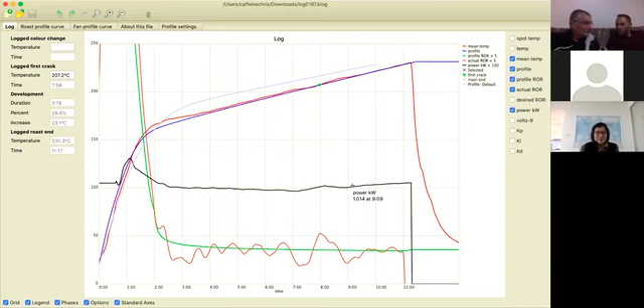So there's two things we could do, Simon. The one is like Chris says, add a power curve into it. At probably what time would that be, Chris? Probably around about 7:10. Well, the way the power profile works, it picks up on the amount of power that's being delivered and then holds steady from that, with a programmed increase, decrease, or even zero flat.

And so what I'm thinking is coming through here, everything's very much under control. And if we picked up that power level there at 6:27, which is 980 watts, and brought it all the way through to there at 1014 watts. So we just made a straight line from there to there.

We're of course assuming that we will be pretty much in the right spot when we come back under control at that point. Yeah. But it may be that simply putting in a boost zone through here just earlier works better. It's an unknown at this stage. Yeah. So Simon, I would try that if I was you. I would try that boost zone a lot earlier.

I would try that boost zone around about your 650, 648, 650, 655 mark. I would start the boost there. And if you look at it, I would end my boost somewhere around probably the 820. Hey, Chris? Out that far? Yeah, or maybe 815, somewhere around there. So you'd be boosting from 650. Yeah. Which is actually the moment that it starts to crash.

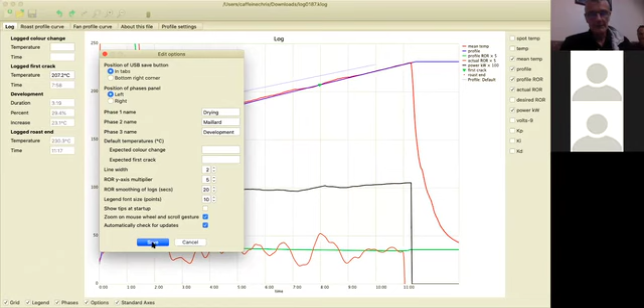So you use it judiciously, and that's why when we were looking at what times you would use to set around that, we looked at the log. I was using 20-second smoothing on my rate of rise line, and that enabled me to pick out the crash from all the other noise going on. So I picked the start and end of my zone really based off that rate of rise.

Correct, yep, 100%, yep. Does that all make sense, Simon?

Sorry, I just had to mute because my computer's deciding to be a hairdryer, so hopefully that's not too much background noise. Yeah, that's great, thanks, that's really good explanation there.

Yeah, absolutely. So getting rid of that kind of dump after your first crack, it's two things - you're either using the tee up of your profile, so your energy coming into the bean through endothermic and then exothermic, using that as a natural boost, or you're adding a boost into that time. But if you make the boost too long, effectively all the work you're trying to do, you will take away, because the profile then overcorrects and there's no longer a problem to correct.

What you're telling the profile essentially is that there's always an error, there's always an error. So there is no error, but you're telling it there is one, so it's always going to try and correct. That's where you see those oscillations over or past first crack. So the time in which you use that zone is critical, not to overshoot it, but also not to undershoot it, because then you won't get the desired effect.

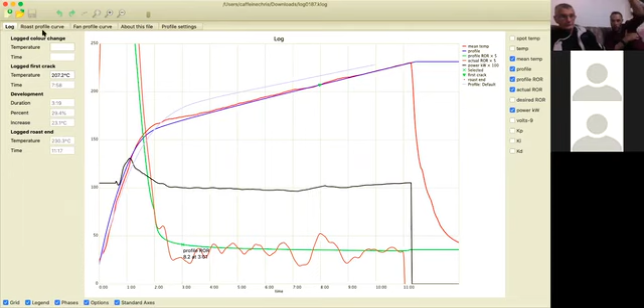Now if we were to reshape your profile, we could do two things. I would start with your ROR line from the start - that huge decrease you're using to get to where Chris is pointing, about the 3-minute mark - I would have that coming down at a further angle, not being as direct or linear as it is, more of an angle.

What that will do with the rest of your profile is, instead of flattening out your curve, you'd almost have to manipulate your curve like a C shape, if that makes sense. And what that does essentially, Simon, is at the bottom of that ROR curve when you're flattening it out, you're still applying heat to the curve, but you're not applying enough heat at the start of the curve.

So you're thinking to yourself, I'm going all the way up, which means that my ROR is dropping. Effectively it's dropping, correct, but it's bottoming out at the end. Okay, so still a decreasing ROR.

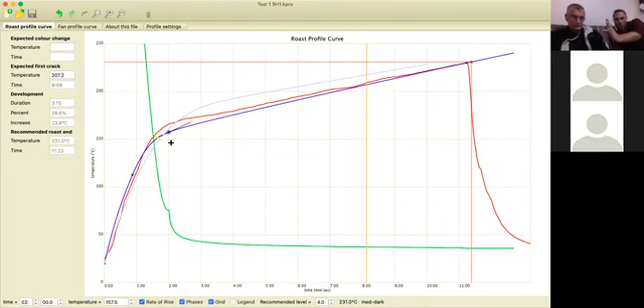The problem is that you're losing too much heat through your Maillard phase, going from exothermic to endothermic, endothermic to exothermic. Okay, so if you had to reshape that profile by bringing it up slightly, which would then shorten your time, you would get a lot more heat generation through your endothermic to exothermic transition. That's what I would say.

So how would you reshape that? I'm actually having trouble with the mouse. Okay, no problem, on this one here. So how would I reshape that?

So actually, if you zoom in, yeah. You can share your screen. Could I share my screen? Yeah, okay, well let me zoom in, that would be easy, wouldn't it? And then we just need to make sure one of us is muted. Sorry about this, guys, give us 2 seconds to do that, Simon.

Okay sure, I'm trying to show you what I want to do. So I've got a profile open at the moment that Chris and I have been tasting and working on, and I'm going to change that profile. Or you know what I'm going to do, Simon? I'll probably bring up your profile and just change it on there if you're okay with that. Okay yeah, that's fine, thanks.

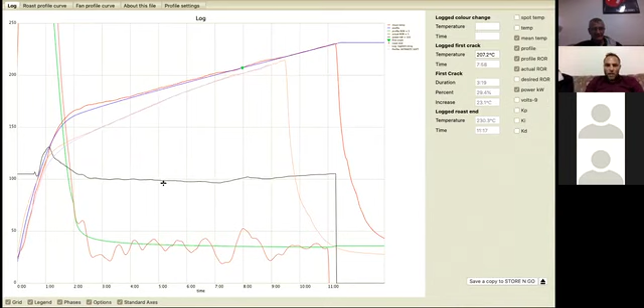I'm going to open that up, and there's your profile. Okay, so if we look at it, that there is beautiful. Okay, and we can see how, so let's do this quick. Sorry Simon, let's just clear all comparisons, so I've got 2 profiles running. So there's a couple of things I look at. I look at this line, which is your power line, I'll look at that flick up, and I'll look at your temperature line sitting under the curve at the start. Okay, so it's matching around this kind of point over here. I almost look at it matching around this point over here. Okay, so how do we change that, essentially?

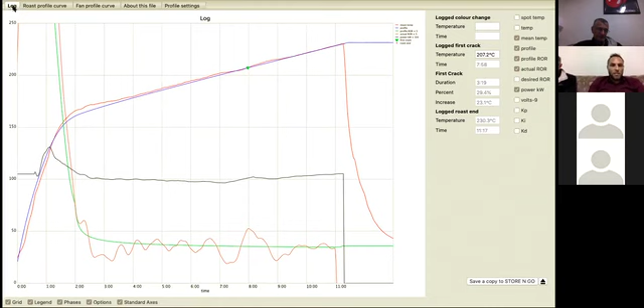Export to profile. There we go. So if I had to look at that, let's just check one or two things here. There we go. Right, so there are.

So Simon, okay, as you look at me pulling it, you can obviously see what I'm doing. So if I go back to your profile, so there's your profile. This line here, I'm trying to almost get this line to follow on there. So if I take that point, for example, and it's just a rough kind of manipulation, and I show you there. Okay, that makes sense. Okay, yeah. Now there's a couple of things I can do here. I can either do that, pull that point like that, okay, which will essentially allow my temperature profile to shoot over and then come around, follow my point, and meet up there.

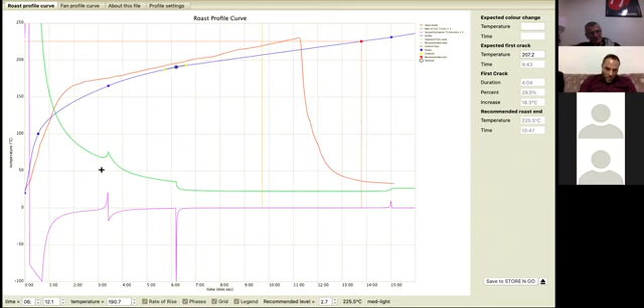Now how I do that essentially is to bring that profile, and you can see how I'm moving your ROR line slightly higher up. So what I'm looking for is for it to follow this trajectory and not a steady trajectory at the bottom. So I'm constantly looking for my ROR to drop.

What that's going to do from the profile, from what I've seen with profiling, is allow this temperature, this mean temp, to increase to here, which is teeing it up. The profile will then, after 30, 40 seconds of preheat... well, stage one preheat will be limited to 20 seconds. 20 seconds, that's correct, will then start to pull me back to here.

And what it does here, Simon, is I've got this intense energy that falls into my Maillard phase, so it starts to fall into my browning phase. Now essentially what you want here is as it joins, it will sit slightly above - this is exaggerated - slightly above, even slightly below, and it should correct itself to being on the profile.

What that will do, Simon, is effectively drag and draw the heat through that now endothermic phase through to exothermic phase. So you'll end up having this effect where your mean temperature is slightly above the line going into first crack, if that makes sense.

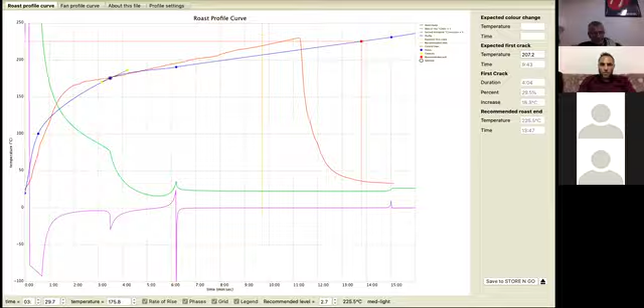Now what I'm going to do is, if I just stop this for 2 seconds, I'm going to bring up a profile for you to show you that type of curve. Now, I would obviously flatten that out. I'd flatten those curves out and try to get that beautiful rate of rise.

Now this is a ready-to-drink curve that we tried yesterday, and this was the log from yesterday. So you can see how mine differs to yours. Yours shoots up there and then plateaus almost there, where mine's shooting up lower in the beginning. You can see how my mean temperature is essentially following it on the outside, and then the profile system is saying, you better join now, my friend.

And it pushes - screen's not shared, Wayne. Yes, sorry, Shaz, you're right. My apologies again. Sorry, I'm getting too ahead of myself. Sorry, Shaz, sorry for that.

No worries. So this, Simon, this is what I'm trying to effectively do. You can see that now. This is what I'm trying to do with your profile. So that line, your profile line, does this. My profile line effectively will go shorter and then have more of a steady peak towards first crack.

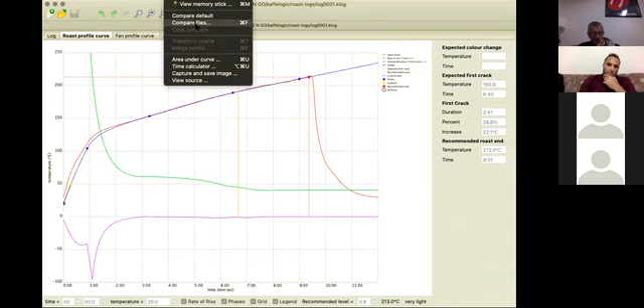You can compare files, work on my downloads. Okay, does that make sense? Yep. Sorry, I'm just trying to manipulate something here.

So what you should see now is me bringing up your profile, your log. There's your log. So you see your log? There's my log, here we go. So at this point here, what you can see is our mean temperatures - your mean temperature, my mean temperature. Mine's slightly off yours.

But what I'm doing here is with me bringing my profile down here, I'm allowing my temperature to start to come back to that profile. So I'm essentially teeing up this line. You can see how my line's at a more steady, increased gradient than yours, versus a flat gradient here. So I'm ever increasing in heat - you're flattening out your heat curve, if that makes sense.

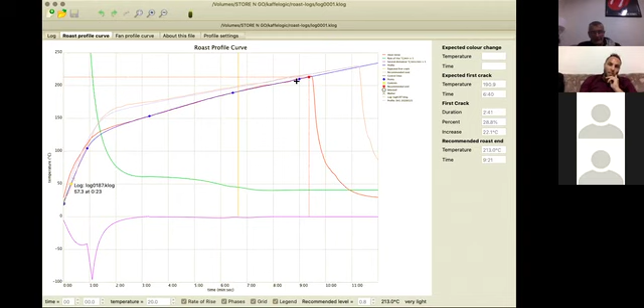Yep. Now that's going to lead me into a first crack there. Now if we look at it, that doesn't really have that dip, or as aggressive a dip, as you see on yours. And that's just because I'm teeing up my profile.

You can see my first crack there, which effectively, if we had to call that a dip and a flick, well that would be my dip there. My dip wouldn't be as aggressive - it's kind of flattened out like that, if that makes sense. Yeah.

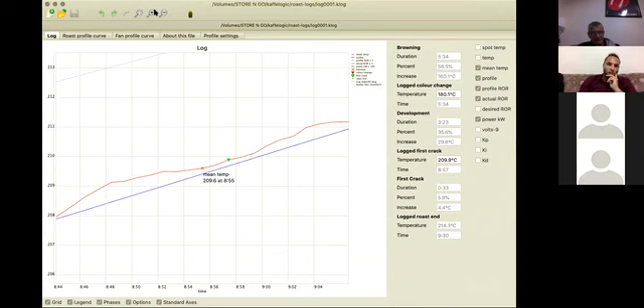Now, you can see from this, I'm not using any form of zones on that either. Sorry, I've got a zone 1 in that. And my zone 1 is effectively working. Yeah, that's where my zone 1's working, just to push that line slightly above.

And that for me is the trajectory that I would want to go. My power line effectively is moving on a nice increased curve. It's got a dip here, but we can look at why it's got that dip in it here. I could have missed first crack, but I definitely didn't miss first crack with it. So that could just be the beans giving off a little bit, or it could just be an anomaly in how the beans are reacting.

But effectively, me teeing up my curve here allows me to have greater endothermic and then exothermic through to my first crack. I'm not using a boost profile on my first crack at all. I'm using the energy that I have on this lift to give me that, if that makes sense. Whereas on yours, the profile's gorgeous. Look at your mean temperature. It's running beautifully above, but your first crack has this divot in it.

And me, I would say, bring the bum end of your profile slightly down, giving you a little bit more tee up into it. That would be first choice. Second choice would be to use that boost in this area, like we discussed, where you could just boost it slightly and try and get away from that flick. So those would be the two options.

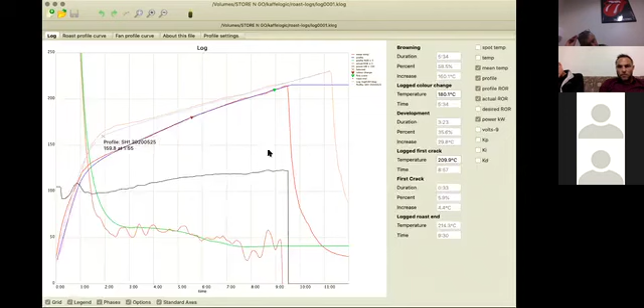One of the questions: those 2 yellow points on either side, what are they? Does that direct the amount of power? No, it's purely a graphical thing. It's a line drawing control, and they control the smoothness of the line at that point.

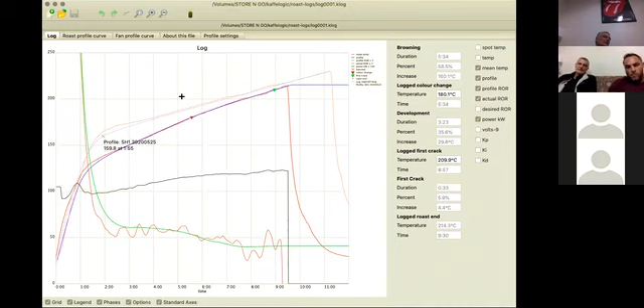The roaster will follow the line, or try to follow the line, but if you manipulate that to give it a bend, then it'll try and follow the bend. And if you use the smooth tool, it'll automatically calculate smoothness. But sometimes when you're trying to get kinks out of your rate of rise line, you need to make hand adjustments to those yellow points. Often you don't. The smooth tool will do it perfectly well.

Good job. But I mean, okay, when you drag that a long way, just so we can see. This? Yeah, drag it right down. Right down? Yep. So you see where I am, Shaz? See the screen? Yeah. So I'm on that yellow point. Now if I drag that down, you can make a complete mess of the line. And then if you click the auto smooth, it will make a smooth line. But you see, that's not as good as you had by hand. Yep, absolutely.

So from my side, you would see that yellow dot is very different to that yellow dot and that yellow dot, just the distance from the blue dot, if that makes sense. And that's the almost hand-drawn, the hand adjustment that you make. You can go in and out with that, and you can go down and up with that. If you look at the profile, in and out would move the kink in your profile further out or further in, where up and down would move the kink further up or further down. Okay, and then you use the smooth tool, and it will smooth all the bumps out.

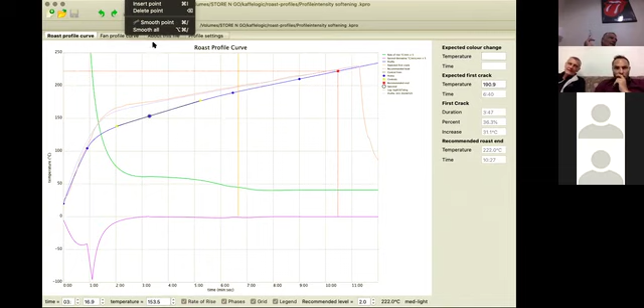And some people would say, I don't bother, just draw the blue spots where you want them, then smooth the whole curve automatically, and forget about any further kinks. Yeah, absolutely. So, Shaz, if you go to draw, you can go smooth all, which effectively will smooth everything for you. And you don't have to do individual points. But you can see my yellow point there, and you can see what it's doing to that curve. It's just smoothing it up beautifully.

So we're about to wrap up, but we can continue this tomorrow if you're happy to. Are you happy with the answer we've given you, Shaz? Sure, because I haven't really got that far into it. I was just a little bit confused with that, and I tried twisting it, and it all went haywire. So I won't touch it. I think I'll just, no.

You must touch it, Shaz, but it's going to take you a bit of time to get your flow behind it. That's the essence behind it. That's where the individualism of the curve, or the profile, comes out. Yeah. But the smooth curve tool is a good starting point. And whether you need to go beyond that or not, that's your preference. It's an open question still. Yeah, absolutely. Cool.